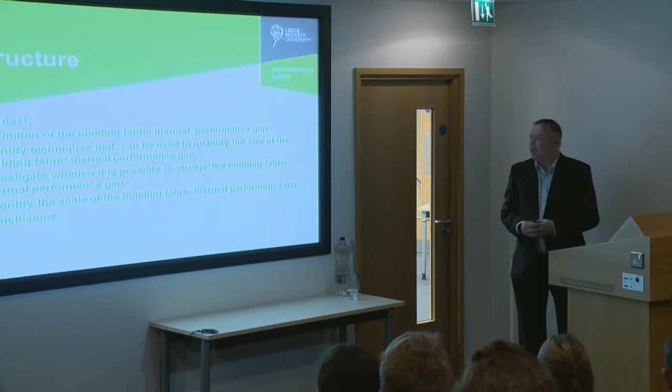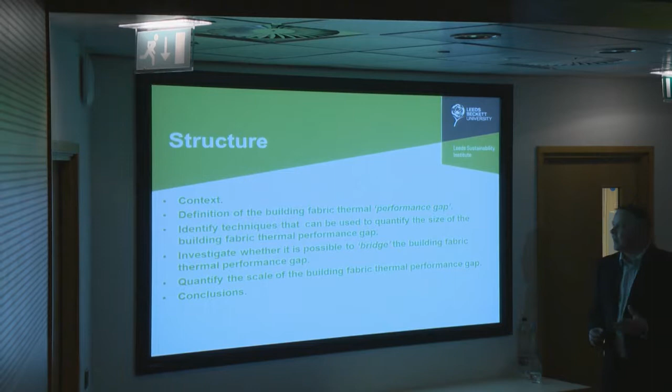So in terms of the structure for this evening's talk: first, I'll look at the context, set within a domestic context, looking at dwellings in the UK. Some of you here, colleagues of mine, know what the performance gap is, but for the rest of you, we'll define what we mean by the building fabric performance gap. We'll look at techniques that can be used to quantify the size of a performance gap, and we'll investigate whether it's actually possible to bridge a performance gap—the title of tonight's talk.

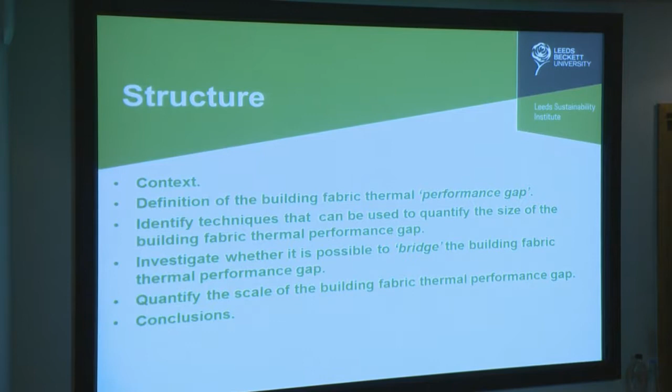There's some other work which looks at a meta-analysis of data we've got at Leeds Beckett University, where we're looking at quantifying the scale of a performance gap. Finally, I'll conclude at the end, and then I'll take some questions.

So in terms of the context in the UK, the domestic sector, like most industrialised countries, contributes substantially to energy use and CO2 emissions. In the UK, about a quarter of all end-use CO2 emissions are attributable to dwellings, and about 30% of energy use is attributable to dwellings.

We all live in dwellings. There are more than 27 million in the UK, so it's a substantial component of the built environment. And they are quite unique in the sense that they have very long physical lifetimes. There's a lot of dwellings around which have been around for a very long time, unlike non-domestic buildings which have much shorter lifetimes, generally speaking.

Stock turnover is also very slow. We haven't gone through any mass demolition programmes, certainly for about 50 years or so. And unless we do that, the chances are that we're still going to be demolishing very few dwellings as we move forward.

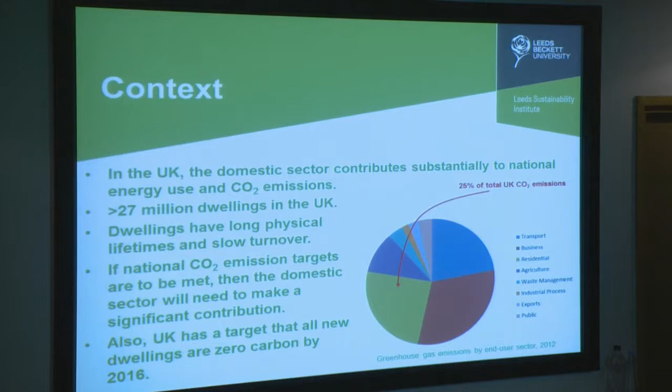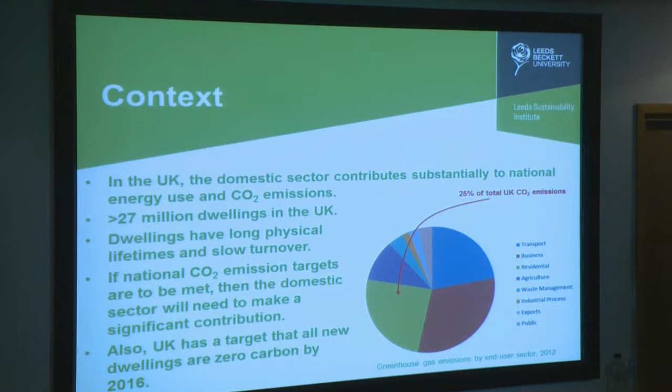If we're going to meet national CO2 emission reduction targets—an 80% reduction in national CO2 emissions by 2050—we're going to have to do something to the domestic stock, to existing dwellings and to new dwellings, because they'll make a significant contribution to any CO2 emission reduction targets we achieve. And there's also the government's commitment that all new dwellings are to be zero carbon by 2016.

So that sets the context for tonight's talk.

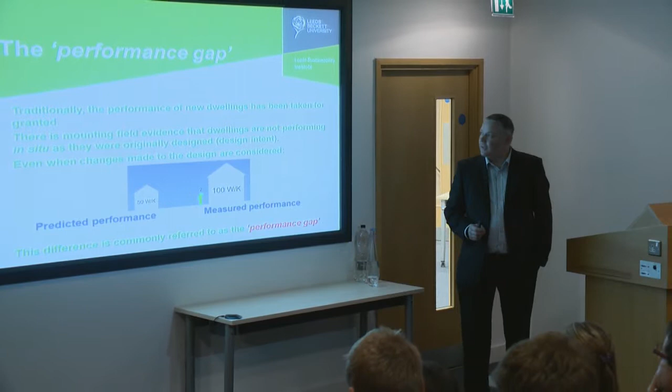In terms of what do we mean by the performance gap, well traditionally, in terms of performance, we're looking now at new dwellings. It's traditionally taken for granted that a developer builds a new dwelling and it should perform a lot better than existing properties, certainly older properties, or that's a theory anyway.

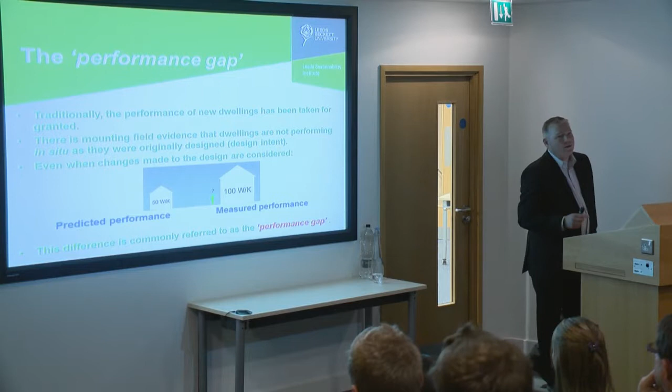There is mounting field evidence that dwellings are not performing in situ, certainly within the last 4 or 5 years. Predominantly, the industry will say there's not a lot of evidence, but there's quite a bit of evidence coming out that they are not performing as they should do, as they were originally designed to do, and that means in terms of the design intent.

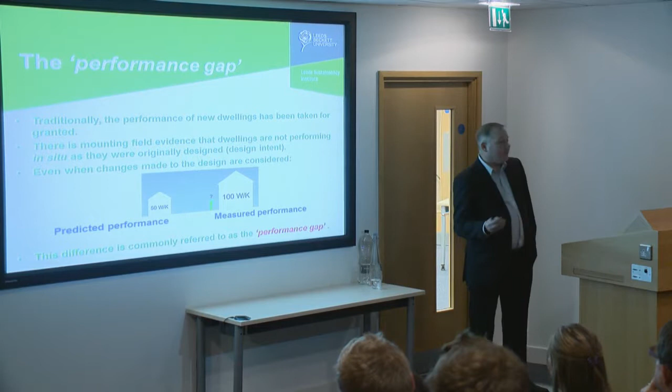Even if we take into account, generally speaking, even with domestic buildings, developers don't tend to build what they originally set out to build. Changes happen on site. We have to make up details because we don't know all the drawings are available. Product substitutions occur. So what's actually built in practice tends to be quite a bit different from what was originally designed. Not enormously different in terms of the actual form and aesthetics of the dwelling are probably pretty much the same, but they may be constructed from different materials, and some of the details might not be quite as they were designed as well.

So even if we take into account all the changes made during the construction process from how it's designed, when we come along and predict the performance based on the best informed information we have about what's physically been constructed, there is a gap between what the predicted performance is and the measured performance. That's us, the little green man there, scratching our heads, wondering how this happened. In some cases, the difference between predicted and measured performance can be quite large as well, and that's what we refer to as the performance gap.

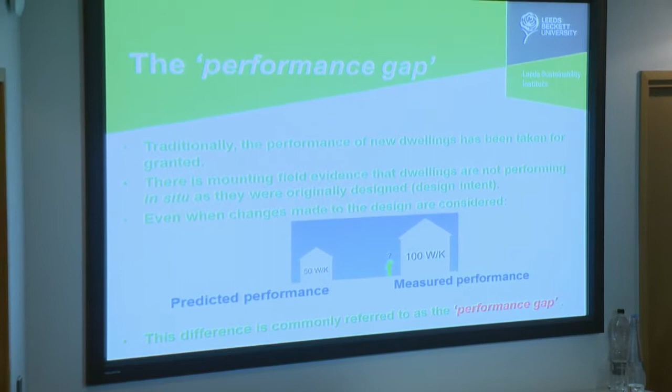So this gap between predicted and measured performance - it's obviously quite important if you design and construct a building to achieve a certain energy consumption or a certain fabric performance, and it achieves something quite different. That can have quite significant consequences for the occupants of that particular dwelling.

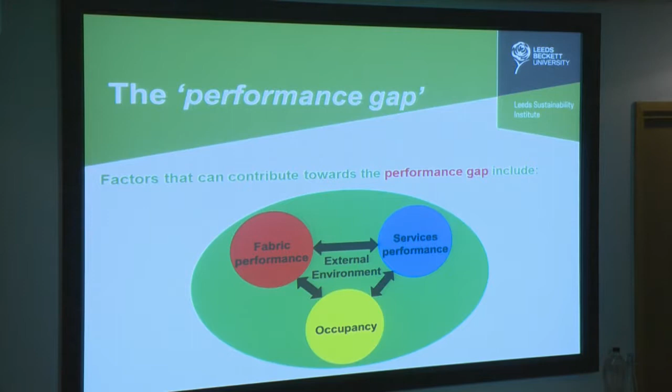In terms of the factors that contribute towards the performance gap, well, there are 4 main factors - 3 which we have control of, and 1 which unfortunately we don't have control of, we just have to live with. There's fabric performance, which we're going to look at tonight. So that's the elements of the building, the floors, the walls, what we're constructed of. That can have an impact on the performance of the actual dwelling itself.

And we're beginning to get a reasonable understanding of fabric performance. It's certainly considerably more information than we previously have had.

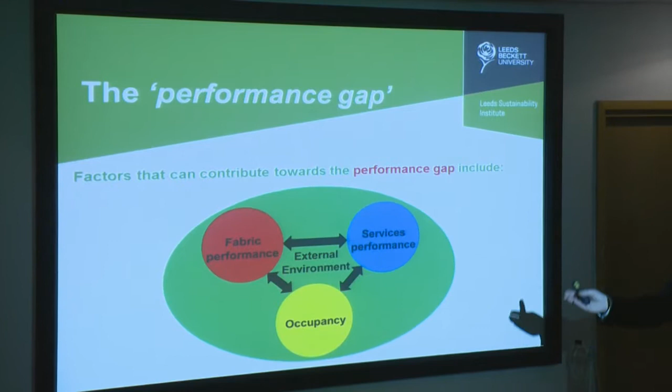There's also services performance as well - so the actual services that go in, the heating system, the ventilation system, any lights that go in there, they can have an impact on how the building performs. So even if it's very well insulated and airtight, the services quite often don't perform quite as well as they should do. And in the most severe instances, they don't perform at all.

And then there's us, the occupants, who - it doesn't matter how well you design the building, how well insulated, airtight, you could have some fantastic services in there - if us occupants come along and don't know how to use that equipment, or how to use the building, we can have a significant impact on the energy use and CO2 emissions as well.

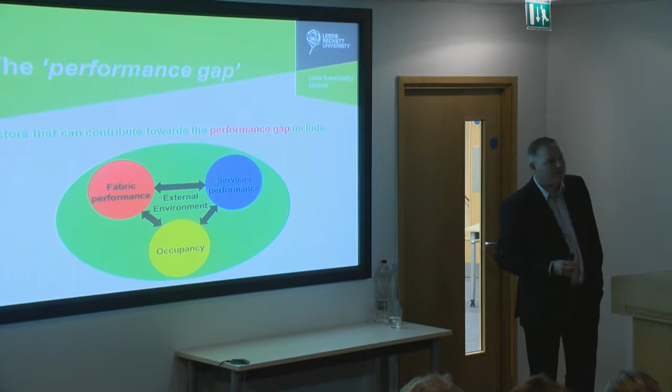And then there's the external environment, which we don't have any control over - or we can design to try and control it to some degree, but generally speaking, there's a limited amount of control over that. And it has an impact on fabric, services and occupants as well.

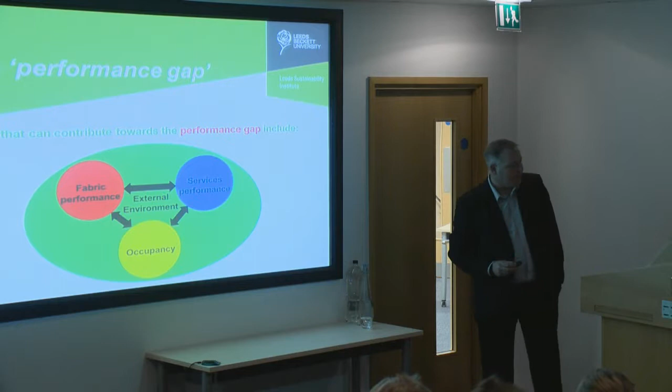In terms of building fabric thermal performance, well, thermal performance of dwellings is incredibly important. It can have a significant impact on energy use and CO2 emissions. If we are to move towards zero carbon housing in 2016, we have to have very airtight and very well insulated houses.

That's a given. In terms of fabric performance, we've pretty much just assumed that we design the building, it complies with building regs.

The amount of insulation that we've designed goes into that building, that goes in correctly, and the building performs pretty much as it should do. So performance is taken as being granted in terms of fabric performance, but in reality it's not actually well understood, and we've got very limited knowledge about the actual true fabric performance of the entire dwelling stock, either existing or even new dwellings.

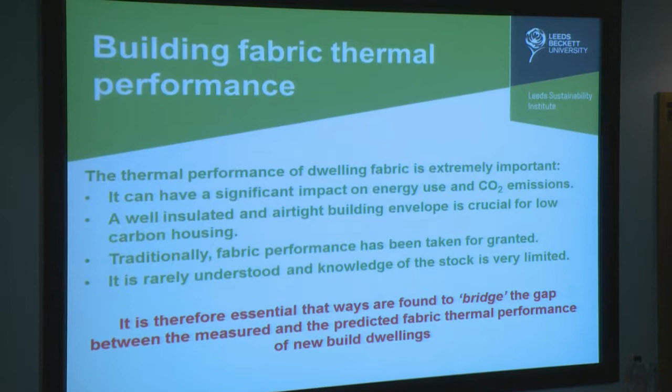Construction is a rather strange industry because it's one of the few industries which doesn't actually test any of its products once they're built. You couldn't get away with it in other industries like cars. But in terms of mass commercial house building, we don't do any testing work, certainly not in terms of fabric anyway. Some testing goes on for individual components like boilers in the laboratory, but not in situ.

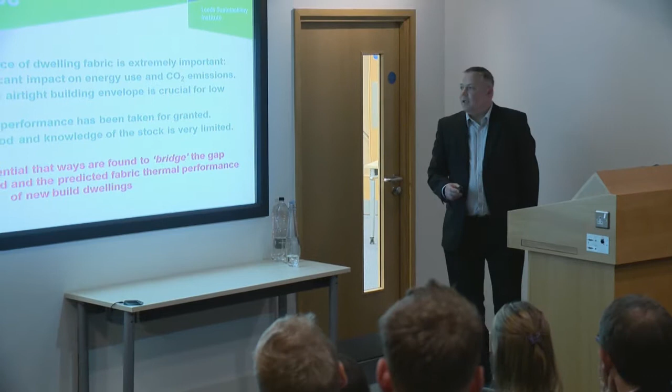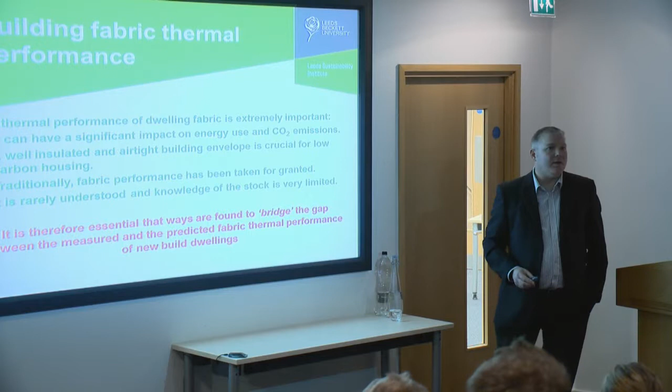So it's essential that we find ways to bridge this performance gap, closing the gap between predicted and measured performance, so they actually perform as they should be predicted to, and hopefully much closer to the original design intent.

There are a range of techniques available to measure building fabric performance. We've got thermal imaging cameras, so we can look at particular elements of a building fabric and determine whether there's insulation, whether there's air movement through the fabric. We can drill holes in the fabric, take temperature measurements, and do airflow measurements to work out if there's air moving through.

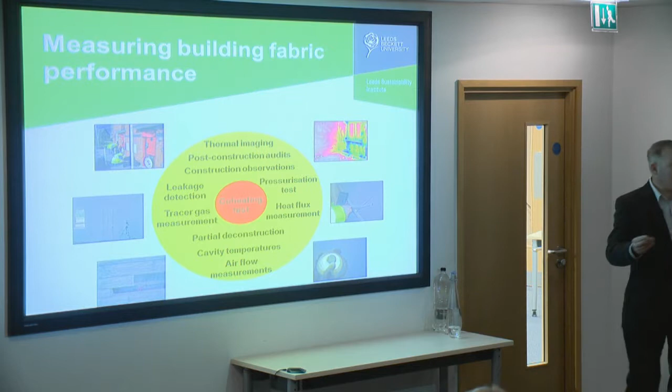We can do some partial deconstruction, which is not always the case, but take parts of a building apart to see if what should be there is actually there. Developers don't like us doing that sort of thing, for obvious reasons, because we usually find things which we'd rather know nothing about.

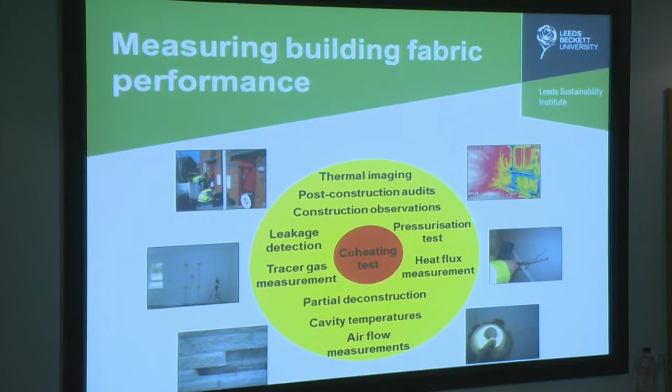We can do heat flux measurements, where we put heat flux plates on the wall and measure in situ U values, and we can do pressurization tests as well. Pressurization tests are incorporated within the building regulations, so that's the only type of test which has to take place for new buildings, within a certain proportion of new dwellings and non-domestic buildings.

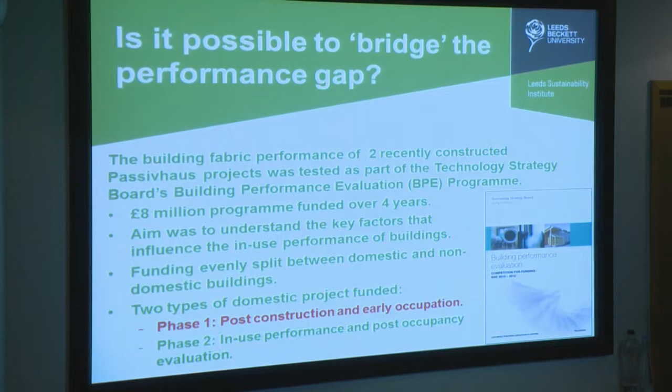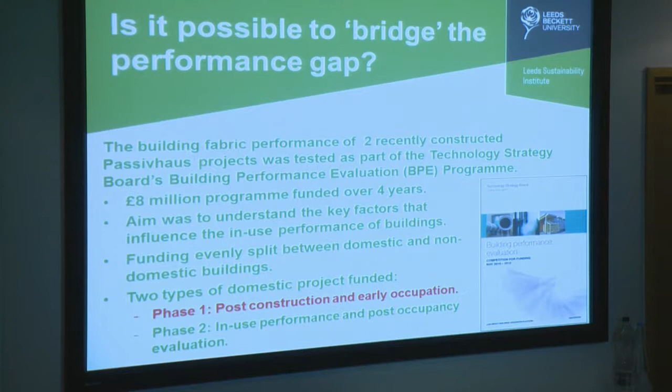So, is it possible to bridge a performance gap? As part of this talk, I'm going to look at two recently constructed passive house projects which were tested as part of the TSB, Technology Strategy Board Building Performance Evaluation Project, now called Innovate UK. This is an £8 million programme funded over 4 years, aiming to understand the factors that influence the performance of buildings and gain more evidence in terms of predicted versus measured performance.

The funding was evenly split between domestic and non-domestic buildings, so 4 million each, and the two projects I'm going to look at in detail are phase 1 projects. They were designed to look at the building pre-occupation, purely as constructed, before the occupants actually moved in, and that required a number of tests to be undertaken.

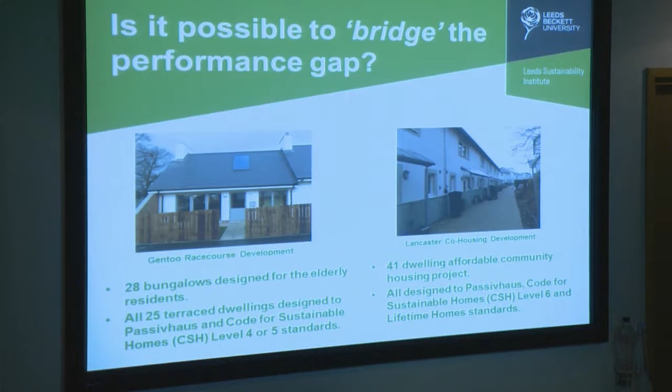In terms of the two case studies here, it's 3 dwellings in total, 2 from one site and 1 from another, so two sites in terms of case studies. One is a Gentoo Racecourse development at Houghton-le-Spring in Sunderland, and the other is a Lancaster co-housing development over in Lancaster.

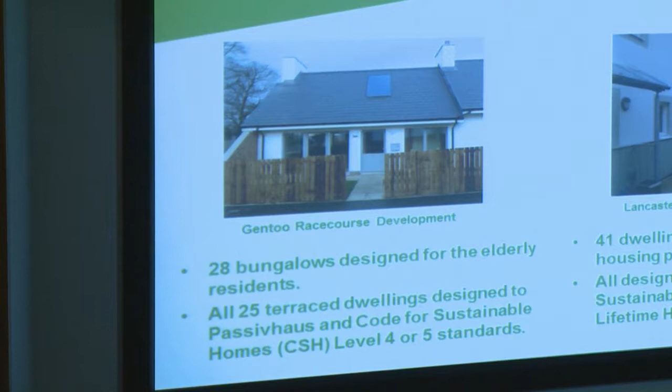The Gentoo development was quite small, but reasonable size given the economic downturn: 28 bungalows designed for elderly residents, arranged mostly in row terraces, with 3 detached bungalows among them. They were all designed to the same standards, but 25 of them were designed to achieve passive house certification, and at the time it was the largest passive house development in the country.

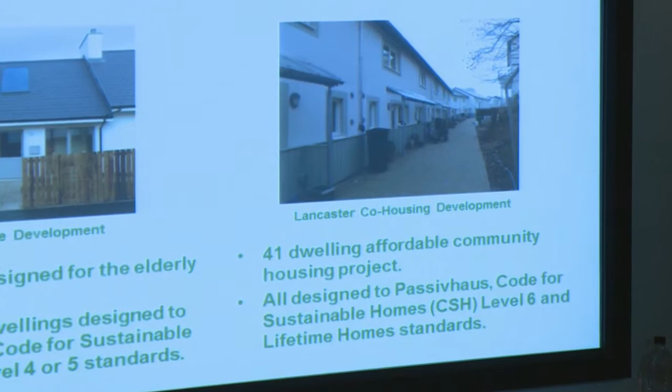In terms of the Lancaster development, they were all designed to passive house standards, and it was the second largest passive house development in the country, but the first to actually try and achieve passive house certification and code for sustainable homes level 6.

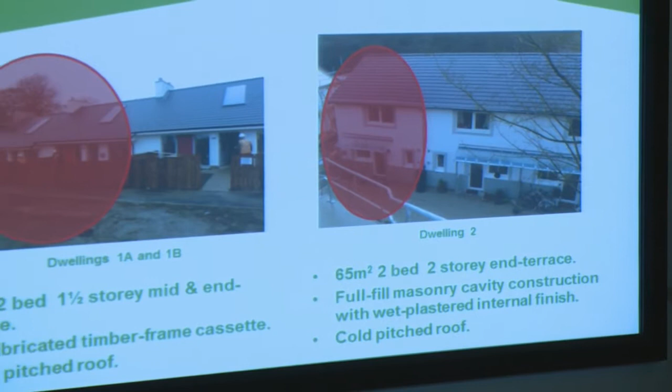In terms of the actual dwellings, we're going to look at the results from them. For the Gentoo passive house development, it's these 2 properties here, which we'll refer to as dwelling 1A and 1B. For Lancaster, it's this end terrace, dwelling 2. They're both roughly the same size, about 65 to 66 square metres.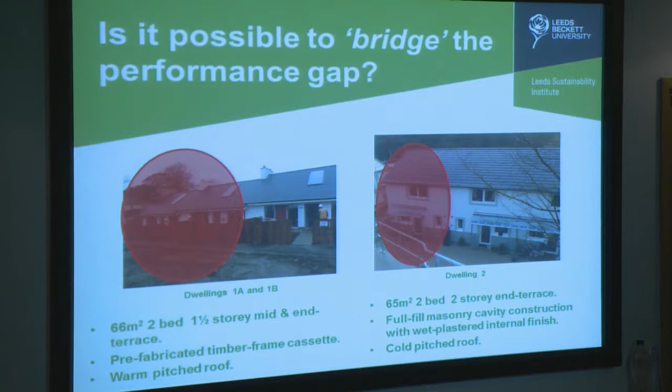The Gen 2 ones are, of all the bungalows we have, 1.5 storey with a mezzanine plant room, and are timber frame construction. In contrast, the Lancaster ones are full fill masonry cavity construction, a much more traditional construction with a much greater amount of insulation within the walls.

Cold pitch roof construction in terms of Lancaster, and warm pitch roof construction in terms of Gen 2.

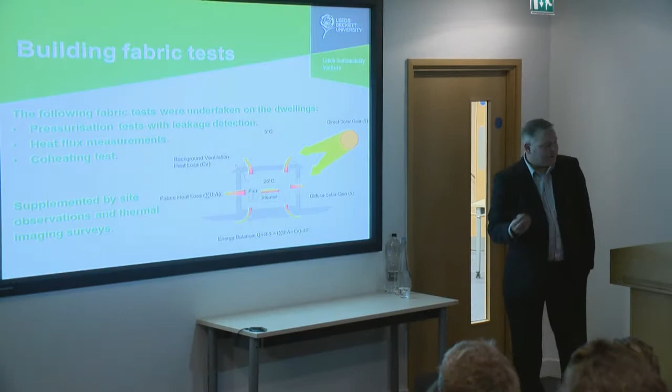In terms of the tests that were performed, a range of tests were required to be undertaken as part of a Technology Strategy Board programme, and they were supplemented by a significant amount of qualitative information as well.

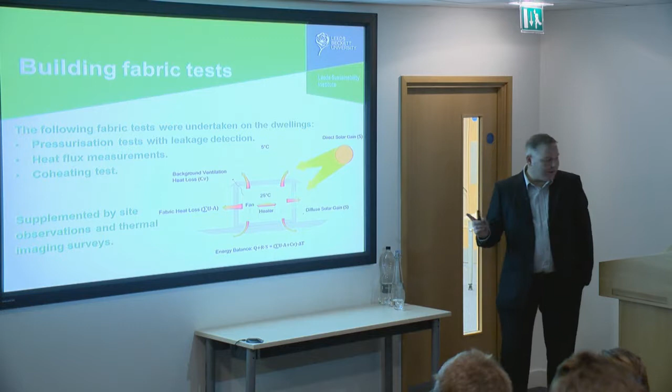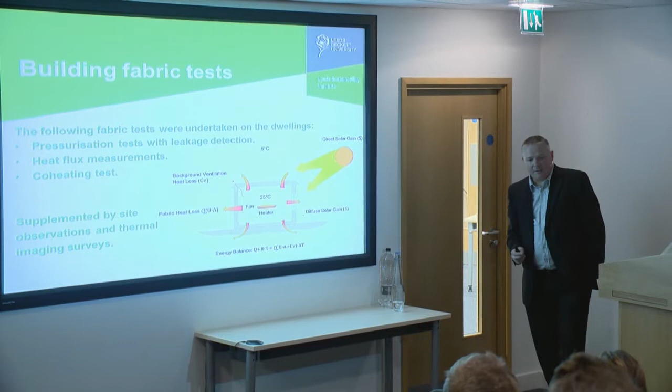So we observed the dwellings as they were being built, did design reviews, did some early occupancy analysis as well. But in terms of the actual fabric testing, principally we undertook pressurisation tests with leakage detection, and heat flux measurements. Pressurisation tests with leakage detection were to determine how airtight the dwellings were and where the leakage paths were. Heat flux measurements were to determine in situ U values, so we could compare the U values measured in situ with those they were designed to achieve.

And then the coheating test, which we've developed - myself and colleagues at Leeds Beckett University, and some who are no longer at Leeds Beckett University - developed a protocol to undertake a whole house test to determine the heat loss from an entire house, based on work that was done in the United States in the late 70s, early 1980s.

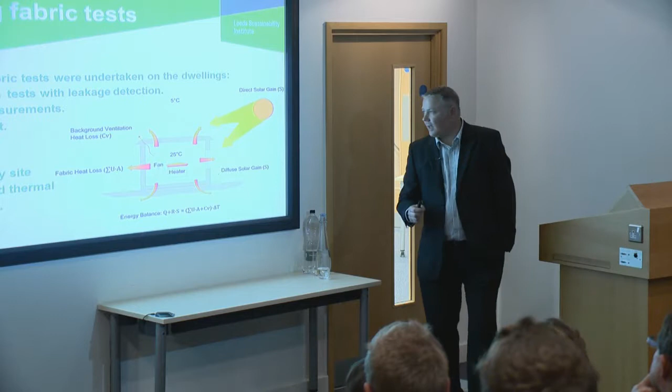The heat flux measurements were undertaken during the coheating test, because the coheating test itself provides ideal conditions to undertake heat flux measurements. What the coheating test does is we heat the dwelling artificially to an elevated mean internal temperature using electrical resistance heaters. We use fans to move the air about, so we heat it to typically 25 degrees centigrade, which is the temperature we use in the UK.

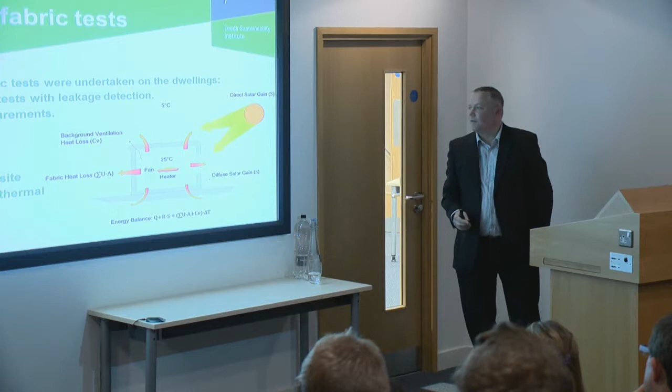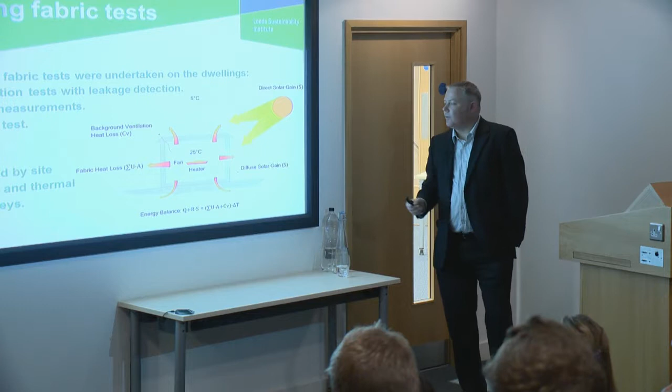We measure all the electrical energy going into the fans and the heaters, and we measure external temperature conditions as well. We can then plot the power used for all the fans and heaters against the temperature difference, and correct the data for solar radiation and potentially wind. This gives us a heat loss coefficient for the actual dwelling itself, so we can determine an instantaneous heat loss for it.

In terms of the site observations, as we expected with a passive house development, they're designed to be very well insulated and very airtight. Construction on both sites, on all three dwellings, was to an exceptionally high standard.

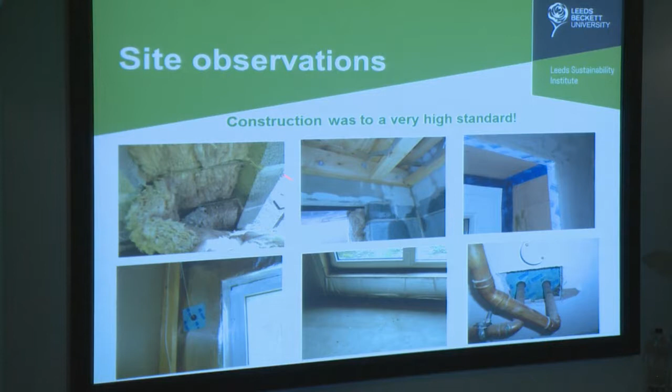All the insulation was in the walls, there were no gaps in the insulation. They paid particular attention to the intermediate floor junction. In this case, it was parged prior to installing the intermediate floor, to make sure it formed part of the air barrier, so there wasn't any air leakage there.

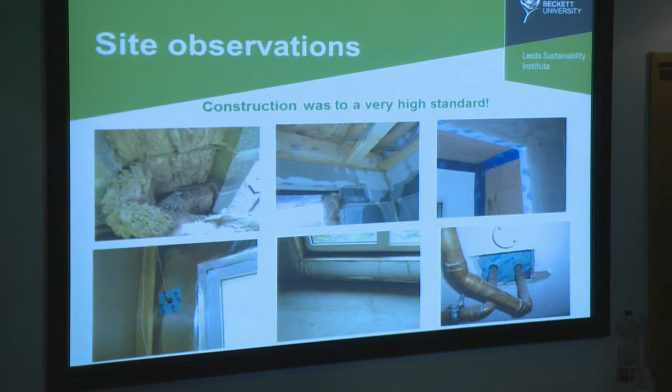They used appropriate tapes, and the walls were wet plastered. On the Gen 2 dwellings, again, appropriate tapes were used where there were service penetrations through the building, paying particular attention to the air barrier and the vapour barrier. So there was considerable effort put into these dwellings to ensure they would meet passive house standards.

In terms of pressurisation tests and their results - as part of the coheating test, we do a pressurisation test prior to undertaking the coheating test, and then one at the end, and take the average of the two when working out the heat loss coefficient for the dwelling. The top pictures relate to the Lancaster coheating dwelling, and the bottom ones to Gen 2.

As we expected, there were very few leakage points - they were very airtight dwellings. In terms of Lancaster, there was some leakage underneath the kitchen sink and around the patio doors, the common areas where we normally see air leakage.

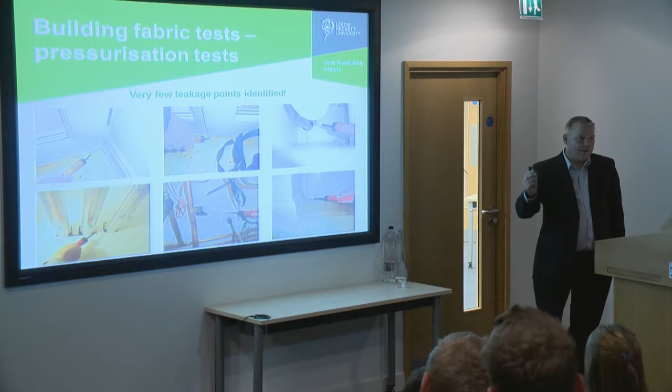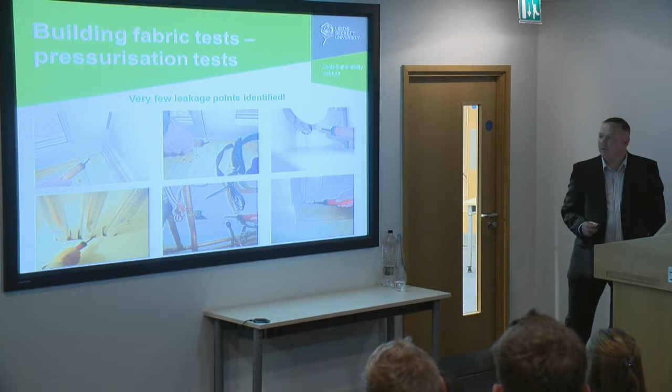In Gen 2, the space heating system comprised a communal boiler which served all 7 dwellings in the terrace, so there was a communal heat main running through each dwelling, and some leakage around there. They'd also been knocking some holes in the plasterboard - there was a service void behind it to get various cables in for an alarm system. There was a bit of leakage round the door as well, but not an enormous amount, not what we'd normally see in mainstream housing.

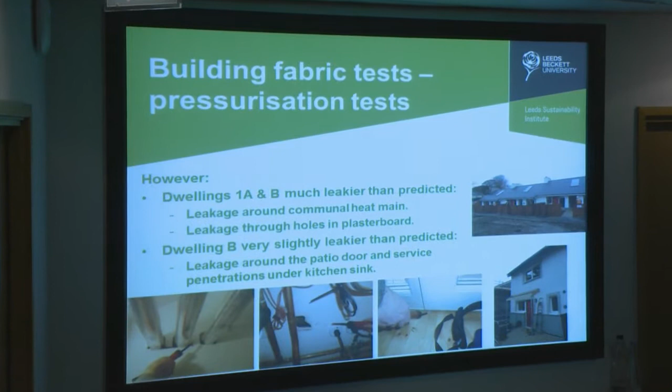However, both the Gen 2 and Lancaster dwellings were leakier than originally predicted - leakier than they perhaps should have been. In Gen 2, this was because of leakage around the communal heat main and the holes in the plasterboard. In Lancaster, it was really around the patio door and service penetrations under the kitchen sink. So that gives us some idea as to where, if there is a gap in performance, some of that may have occurred.

In terms of measuring U values, measuring the in situ U value of all the plane elements, the walls, the floor, the ceiling. A whole range of heat flux plates were installed in the dwellings, up to 20 in each dwelling, on the main thermal elements.

The majority of the elements actually performed pretty close to the specified design U values. The only real discrepancies were in terms of the Gen 2 dwellings, 1A and 1B. There was some discrepancy with roof detail, mainly related to the position of the heat flux plate, because it was very close to the eaves junction, rather than to the actual performance of the roof itself.

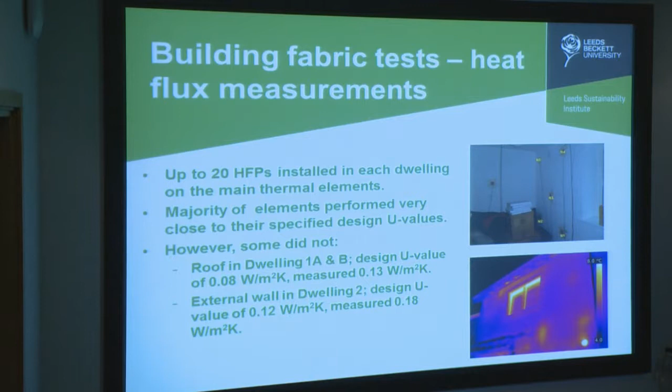The external wall in Lancaster was a bit higher than design, mainly due to a thermal anomaly which unfortunately we hadn't picked up prior to its placement. But externally there was an anomaly directly correlated on the outside of that wall, this slight patch here, which could give rise to some of the difference.

Also, one of the problems with very small dwellings is it's very difficult to find large expanses of wall, where you have a north facing wall, where you can actually put the sensors on to obtain relatively accurate in situ U values.

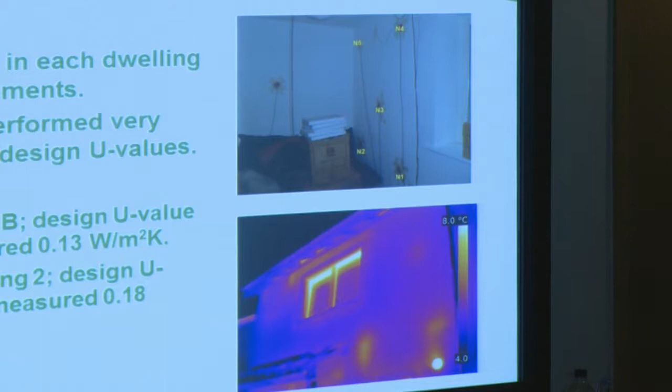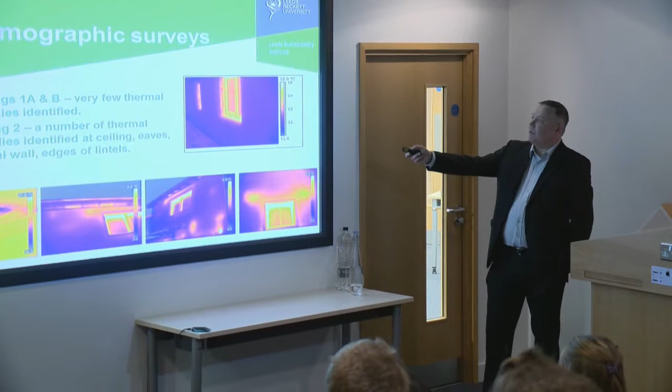We also undertook thermographic surveys as well. Again, they identified very few thermal anomalies at Gen 2. It was really because there was some detailing which hadn't been finished around the windows on one of our properties. And in the ones at Lancaster, there was thermal anomaly in the external wall.

They had some issues getting the insulation in the loft right into the eaves to a sufficient depth. There was no loft hatch, so they had to cut a hole into the ceiling to gain access. As part of that process, it's very difficult once you cut a hole in the ceiling to get the insulation to come back down onto that ceiling once you've done it. So that was part of the issue as well.

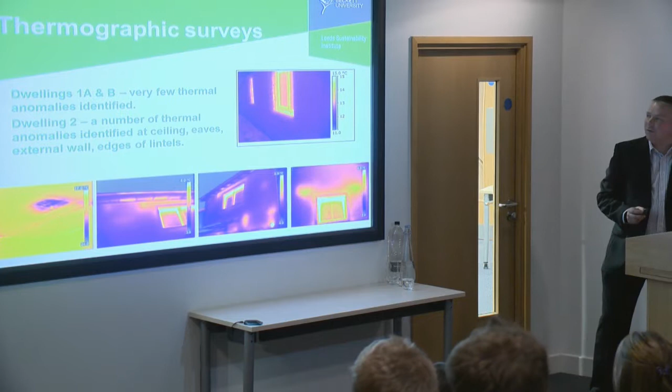There were some issues around the actual edges of the lintels on the windows as well, which may have been some sort of residual construction moisture or a discontinuity in the insulation around the cavity tray. Very difficult to know exactly what they are unless you do actual partial deconstruction. With them being passive house developments and occupants desperate to get into them, it just wasn't possible, unfortunately, to do that using non-destructive testing methods alone.

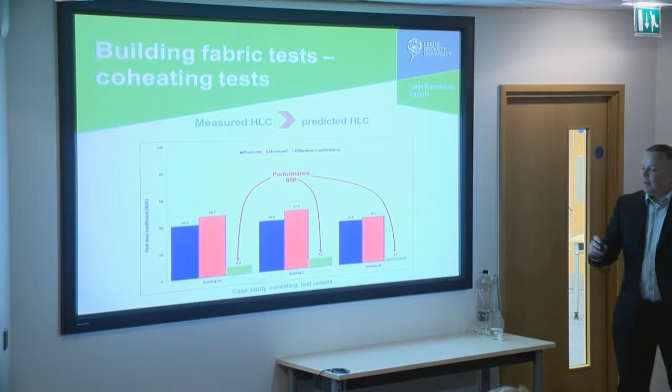In terms of coheating tests, and this is really the key one, in all three dwellings the measured heat loss coefficient, which was the output from a coheating test, was greater than the predicted heat loss coefficient. But in each case the difference was incredibly small. So the actual gap in performance between measured and predicted was very small, and it's certainly the smallest gap that we've ever measured before in all our experience of undertaking coheating tests.

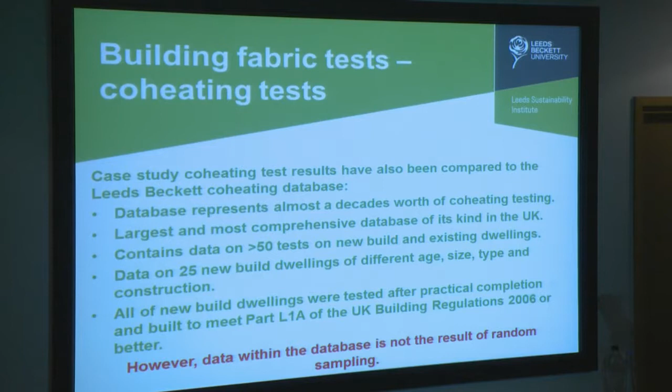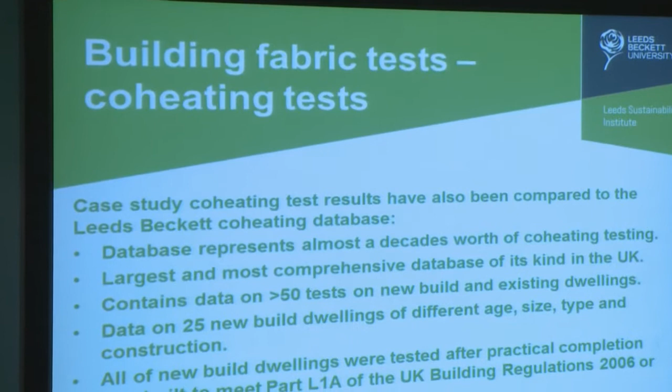In order to be able to put some context to those figures, we compared them to a database of coheating data. This database represents almost a decade's worth of work at Leeds Beckett University with myself and colleagues. It's the largest database of its kind in the UK.

It has information on new build dwellings, existing dwellings, a range of different construction types, ranging from timber frame, one hemcrete dwelling, to masonry cavity construction. Some are passive house dwellings, some of them are not, some of them are more mainstream housing. Includes apartments, semi-detached, various different forms as well.

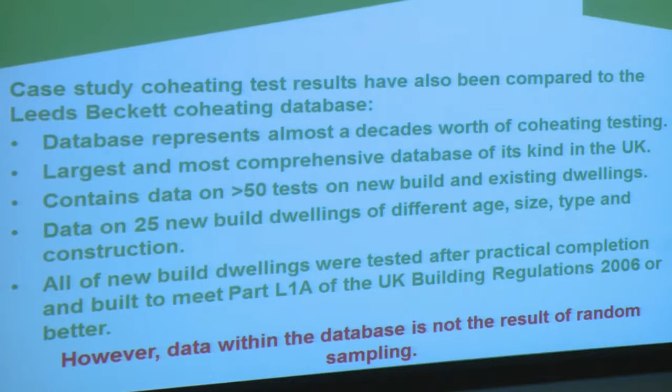New build and existing, but in terms of new build, which we're specifically looking at tonight, it's just 25 dwellings. We've done over 50 tests, probably closer to 100 tests, and some dwellings have been tested multiple times. So they've been tested, interventions taking place, such as the cavity walls being filled with insulation, and then the dwellings being retested.

In terms of the new build ones, they were all tested very close after practical completion, prior to the occupants moving in. Apart from one at Lancaster, the occupant was decanted and then moved back into the property, but she'd been in the property only a short period of time. And they were all built to Part L1A of the Building Regs 2006 or better.

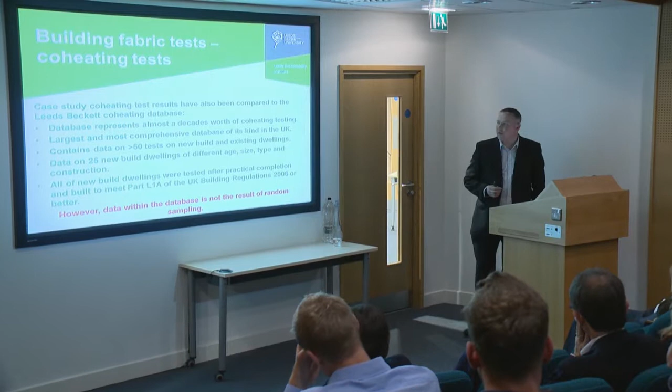However, most of the dwellings, in terms of the new build dwellings, it's a non-random sample. Unfortunately, we've only been able to test the dwellings which become available, which form part of projects like TSB BPE program. They tend to be low energy developments. So you would think that this is, in terms of context, probably giving you a slightly skewed picture.

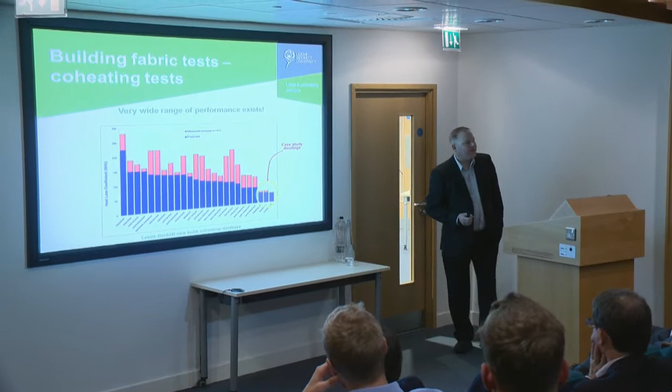If we actually look at the database and just ranked them in terms of highest predicted heat loss coefficient to lowest, it's quite clear the case study dwellings stand out a mile.

As you would expect, the passive house developments compared to the rest of the developments have very low, very well insulated and airtight predicted heat loss coefficients to start with, and the actual measured heat loss coefficient was very, very close to that, incredibly close.

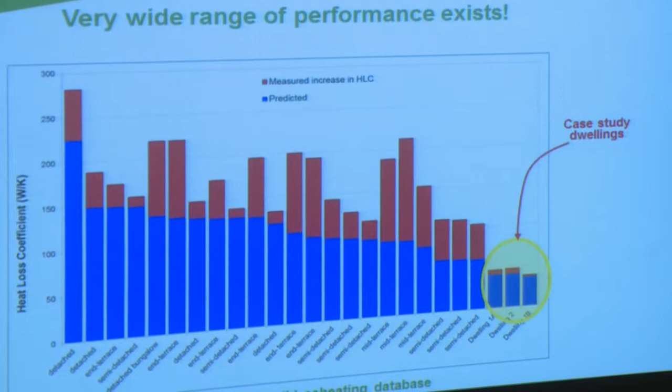But you can see the range of performance that we have within that database, so quite a wide range. And bearing in mind that these are low energy dwellings, this is painting possibly a slightly rosier picture than might actually truly be the case if we're looking at more conventional mainstream housing.

So what this sort of indicates is that all three case studies perform very close to what was predicted. They're in quite stark contrast with the majority of data that's available on new build housing.

And what we do suggest is the size of the gap is small enough that it is technically possible, practically possible, to bridge a gap between measured and predicted fabric performance in new dwellings. The questions are, why did these dwellings perform quite as well as they did in comparison to all the other ones? That's the golden question, and the answer everybody wants to know.

Well, in terms of these dwellings, they were passive house dwellings, so they had very stringent design requirements to start with, as part of a passive house certification process with a whole range of additional quality control procedures which were put in place as these dwellings were being constructed.

They were air tested, pressurisation tested, partway through construction, and that's not the norm for mainstream housing. So that could perhaps be part of the reason why.

They're also designed and built by a highly skilled, educated and committed team. They had experienced passive house designers doing the design. The designer was on site constantly feeding back to the construction team, and the construction team also had a vested interest in the dwellings and their performance ultimately at the end.

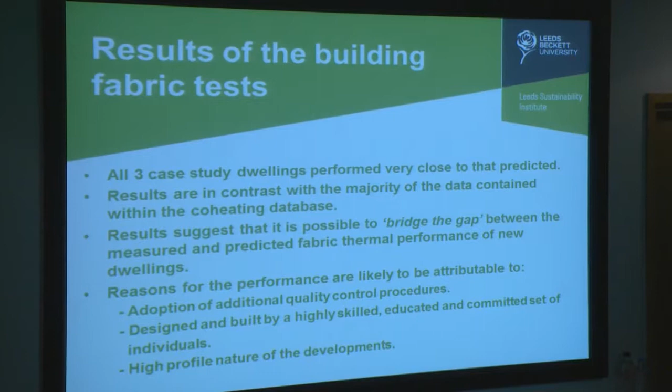And they were also high profile developments because they were the first of a kind. Obviously the price of failure was considerably higher than if it's just conventional mainstream housing as well. So these are probably the reasons why these dwellings performed quite as well as they actually did.

If we actually go back and have a look at the coheating database, there's some other information that we can get from this which is interesting as well. If we try to do a meta-analysis now, you just have to bear in mind that it's a small non-random sample, 25 dwellings in total.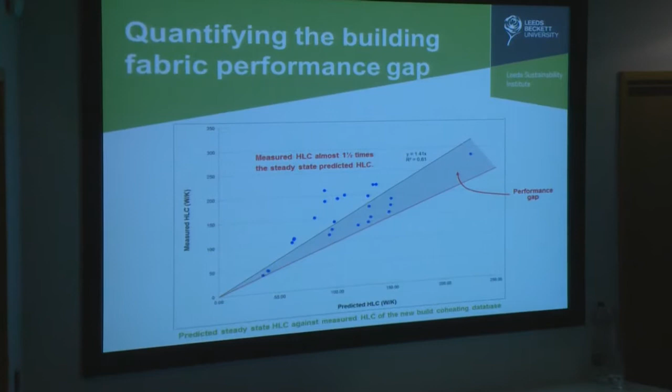If we actually plot measured consumption against predicted consumption, this is the sort of performance gap. This is what we would expect if measured and predicted were the same, which ideally is your ultimate goal. You can't have measured consumption lower than prediction, otherwise either your prediction's wrong.

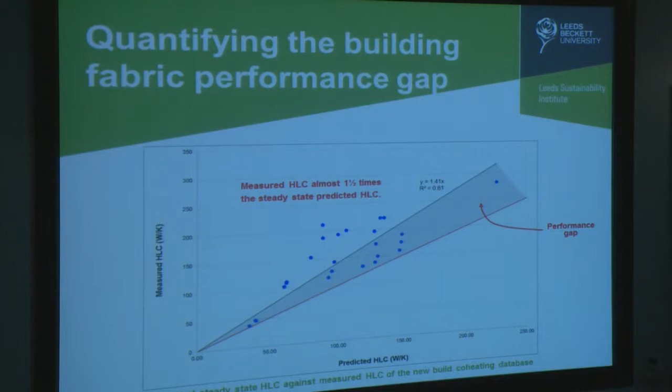The only way you can do it is by putting more fluff in than should be there, but that means your prediction should be tweaked accordingly. So this is the sort of scale of this, generally the scale of a gap.

If you do some very simple linear regression analysis, based on the sample we've got, it's about 1.4, almost 1.5 times the steady state prediction. So that's got significant implications in terms of design, construction, and trying to achieve any CO2 emission targets if the data we've got is suggesting that the heat loss coefficient is going to be almost 1.5 times what it should be from the actual outset.

And that's bearing in mind the actual sample we've got is best case. It could be considerably worse than that.

Although you do have to just treat discrepancy with caution because it doesn't take into account any factors such as the dwelling form, the size of a dwelling at all.

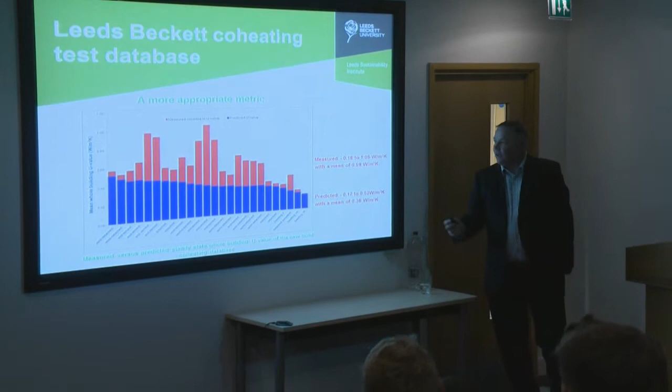And if you actually look at it in terms of a frequency distribution, you can see the range of predicted U values is quite narrow, but in terms of the actual measured performance, it's very, very large. Quite a distinct difference between the two.

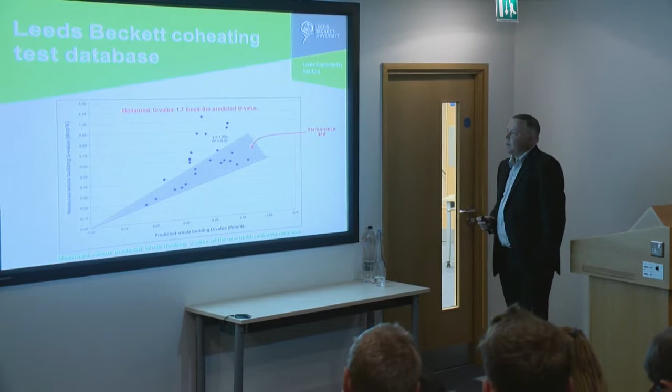If you look at the data in terms of whole building U value, the performance gap is about 1.7 times. So it gets slightly worse if we strip ventilation out of the equation compared to just looking at measured versus predicted to start with. You've got a number of significant outliers there as well.

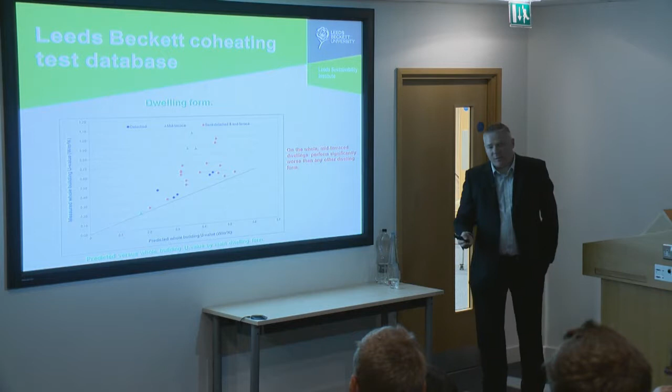And then if you look at the data in terms of dwelling form to see if there's any messages - again, you just have to remember it's a very small database, but it is the largest single database of its kind that we have. All the tests have been undertaken, not necessarily by the same team, but by the same organisation using the same protocols, so there's consistency there.

There are some messages that start to come out. Detached dwellings tend to perform much better than other dwelling forms. Mid-terrace dwellings, although there's only small numbers, tend to be, generally speaking, the poorest performing.

Part of the reason for that's most probably because all the mid-terrace dwellings had a cavity party wall, and they were tested as being built to comply with 2006 building regulations. At that time, the U values associated with party walls and the party wall bypass had not been addressed by the building regulations, so the predictions for these dwellings don't take that into account.

Then if we look at construction type as well, there also seem to be some messages coming out. The best performing construction type tends to be timber frame and structurally insulated panel systems, and the poorest performing - no real surprise for us involved in doing testing - is partial fill cavity masonry.

Part of the reason why that's likely to be the case is that with partial fill cavity masonry, there's a range of issues associated with assembly, trying to make sure that the partial fill boards are flush against the block work inner leaf. Otherwise, there's a risk of thermal bypassing occurring behind the insulation.

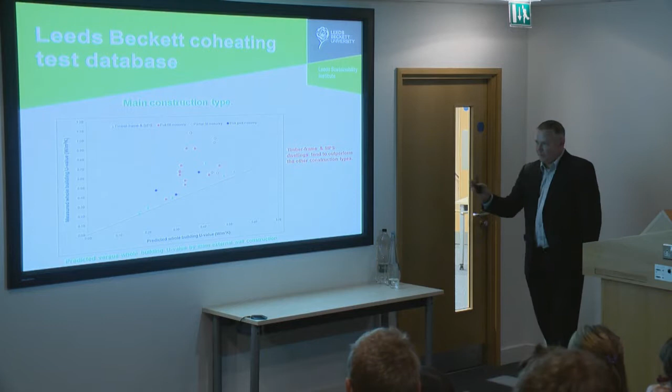Also making sure that all the junctions between the insulation are taped. And partial fill is also highly susceptible to wind washing effects as well. So it's not necessarily quite as robust a construction as others.

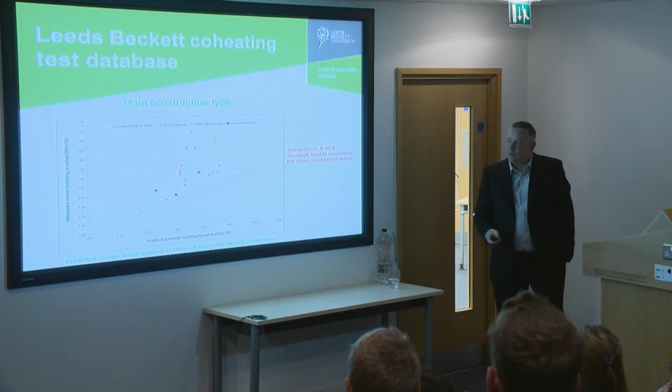But again, these are just very, very preliminary findings based on the database that we have. There's obviously considerable work needed to increase the amount of data within that database and see if these inferences actually change. So to conclude, there is a significant building fabric performance gap in new housing.

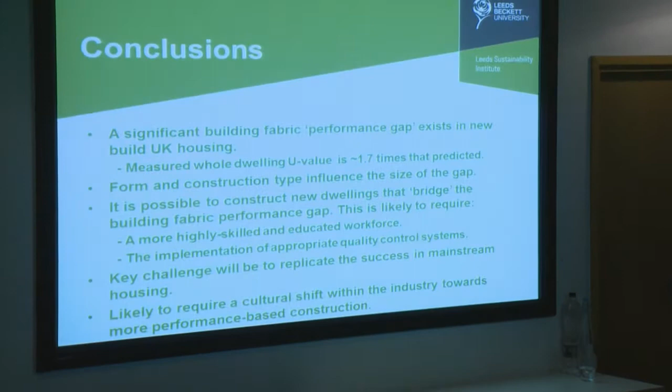Looking at the data in terms of whole dwelling U value, which is probably one of the most appropriate metrics to use, whole building U value is, based on the data we've got, about 1.7 times greater than that predicted. There appear to be differences in terms of dwelling form and construction type, which can have an influence on the size of a performance gap.

Although we have to be a little bit careful with form because it may just be due to some of the data that we've got. The most important message - because a lot of the work we do actually tends to find fault with what's wrong with buildings, that's just the nature of the work we do -

it's always nice to come out with something that's actually positive: that irrespective of how poor we may think some of new build housing actually is, we can actually construct new dwellings that perform pretty much as predicted. So we can pretty much bridge the performance gap.

Although it's not going to be easy to achieve that within mainstream housing. We need a much more highly skilled and educated workforce which is aware of the issues which can contribute to a degradation in performance.

As they're constructing the actual dwellings themselves, we're likely to require the implementation of a whole range of quality control procedures which are not in place at the moment in mainstream housing, more akin to what's in place in terms of passive housing design and those that achieve passive house certification.

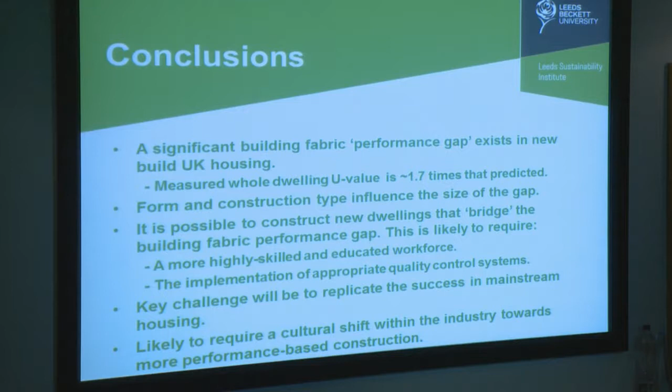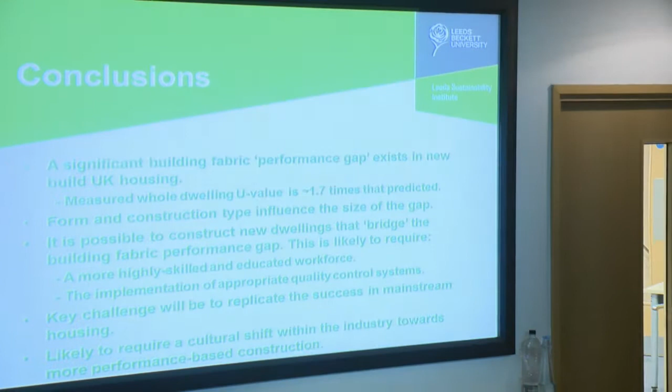So the key challenge is going to be how to replicate this in mainstream housing. Can we make sure that the workforce is more educated, more highly skilled, more committed to building dwellings that actually perform?

Can we implement quality control systems to make sure that it's one of the few industries where if you go to a lot of the major house builders, we don't really know, bizarrely, what their houses actually are built of. Whereas if you go to a car manufacturer, they'll be able to tell you every nut and bolt exactly where it's gone into the car.

Whereas in terms of house building, quite often what they think it's built of is not exactly what it's built of at all, but they don't know what changes have been made. The construction manager may know, but those sitting in the boardroom don't generally tend to know. And it's likely to require a cultural shift within the industry towards much more performance-based construction.

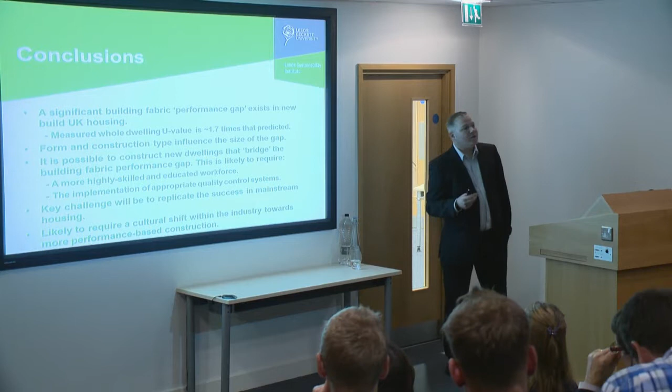So in terms of construction, we don't test the performance of the product, the house, at the end. And it's very unusual within most industries not to do that. We do some testing in terms of pressurization testing, but I'm not suggesting here that we have to test every house, but at least there has to be some testing process in there to make sure that we're actually confident that what we're constructing is actually going to perform and doesn't either have a detrimental impact to the environment or to the occupants within the building as well.

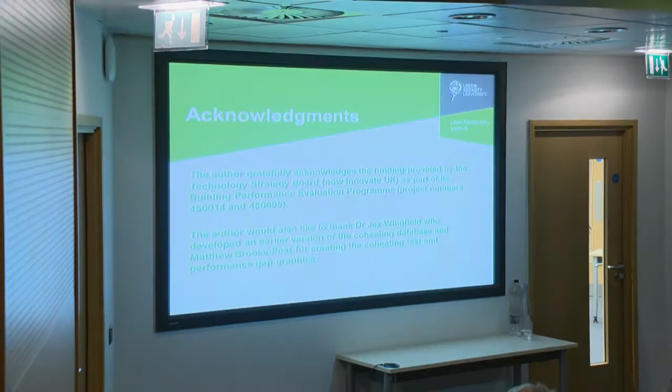So that's all. Some acknowledgements there. A couple of colleagues have provided some graphics, Dr. Jez Wingfield, he was the original founder of the Coheating database, and also thanks for the funding provided as part of the TSB Building Performance Evaluation Programme as well. So, thanks very much.

Well, thank you for that. A most interesting review of some of the work I knew was going on. Chris has been telling me for ages about this, and Malcolm too. Very interesting to hear about it.

We're now open for some questions, but I'm going to take ringmaster's privilege here and ask the first one. As I understand it, there aren't many new builds happening compared to the stock we have. Is there anything in your whole career to date, including this, that could help people like me who own a house built out of random stone and stuff?

What lessons have you learned throughout this research which could help the existing stock holders, shall we say? Well, colleagues have certainly been involved in doing quite a bit of work on retrofitted properties as well, and we can perform Coheating tests on retrofitted properties, existing properties as well, although it does require the occupants to be decanted because the test requires there not to be any occupants within the building while it's taking place.

So some of the work that we have been involved with is looking at intervention measures, so looking at retrofit stages, so cavity wall insulation, external wall insulation, internal wall insulation, and looking at how it performs in situ, looking at how it's been installed, and seeing whether the actual savings that are claimed from the products actually occur in practice when the occupants go back in as well. And we're working with some industry colleagues in here today who were involved in projects which are specifically addressing existing stock. Okay, thank you very much.